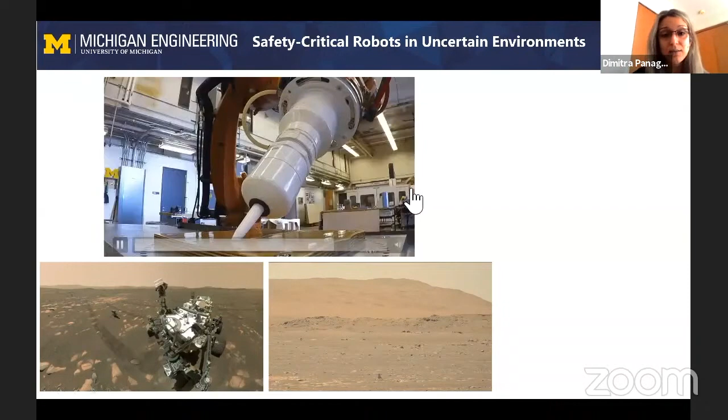And to add more excitement about uncertainty, I thought to include also the videos from Perseverance and Ingenuity that show we have robots operating on another planet.

So I think it's important and evident that maintaining safety in uncertain conditions is of paramount importance, because when this is not done and things are not carefully designed, then things can go wrong.

For example, a simple change in the payload can make a drone plummet from the sky, or not carefully designing safety inter-safety distance can make quadrotors collide with each other, or safety specifications not being met can make a rocket landing go really bad.

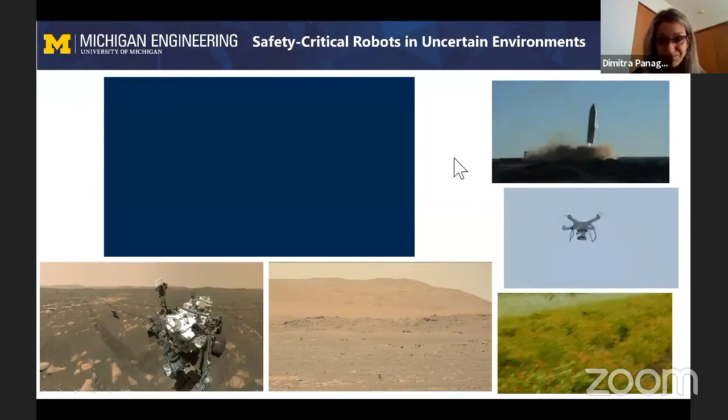So planning and control under uncertainty is a long-standing topic within robotics, artificial intelligence, and the controls communities. To keep discussing this with a simple case study example, let's consider we have a quadrotor or an aerial robot that has to navigate in an urban environment.

So there are obstacles, like physical obstacles, the buildings. There might be other quadrotors navigating also around. And it also has to navigate in the presence of processes like, for example, wind.

So the quadrotor has imperfect information about the environment through its own a priori knowledge and its own sensory information. It has to make decisions on, for example, whether it's safe to go through this path, or whether it should go around the obstacles, so that it safely keeps distance with respect to the obstacles, using information about the wind that it doesn't directly measure, so it has to estimate on the fly.

So that creates a problem of safety under uncertainty. Some of the questions related to this problem are: how we can ensure that the system trajectories will always remain safe in an unknown environment, where we might not know exactly the location of obstacles, or the wind affecting the motion of the vehicle. How we can reduce uncertainty while staying safe.

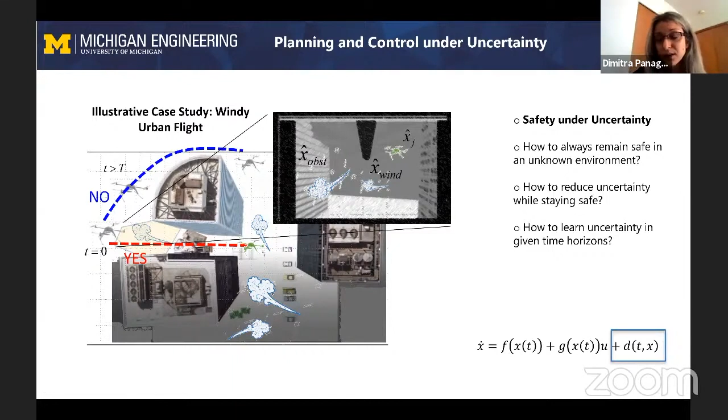We have to be able to act fast. As a control theorist, I'm more biased towards approaches where we assume we have a portion of our environment and model that we can assume we know with reasonable confidence. Anything else that is more difficult to model or measure is usually lumped into a parameter D, the disturbance. So essentially the question is, what can we say about this D, and how we can handle it in order to maintain safety?

So I'll start my talk with the simpler case of considering no disturbances, still using the quadrotor moving among obstacles as a motivating example.

I'll describe how we can encode safety as set invariance, a well-developed approach throughout the years by many people working in the area. So the quadrotor has a safe set of states in which it is allowed to visit. Essentially, safety can be cast as a set invariance problem, or how we can make the state trajectories always remain within this safe set of states.

In addition, I will consider timed specifications as one of our performance objectives. So the quadrotor does not merely need to go from initial point to a goal point, but also needs to make sure that it will visit certain waypoints in between.

Within given time horizons, in the first part of the talk I'll describe our framework on spatiotemporal control synthesis that relies on quadratic programming and merges safety encoded as control barrier functions and the timed reachability objective by means of fixed time stability notions. That is a novel construction that we have been working on.

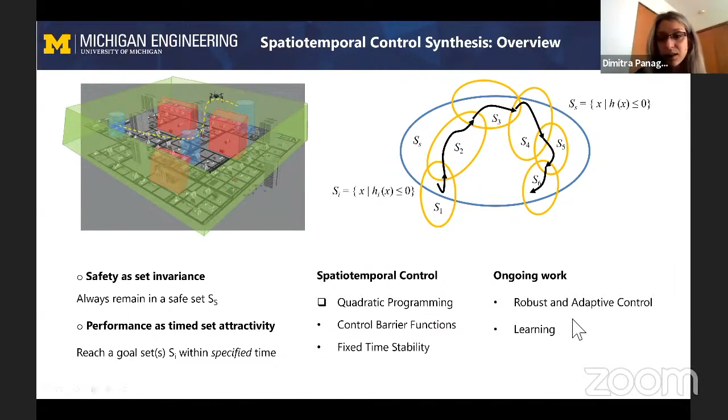And in the second part of my talk, I'm going to describe our ongoing work on how we can extend this nominal framework to account for disturbances in robust adaptive control settings, and our thoughts about how we can further integrate more sophisticated learning techniques into this framework.

Okay, so to get started with some preliminaries, safety, as I already mentioned, can be thought as a forward invariance of a safe set problem. So we consider that we have our nonlinear control affine dynamical system, no disturbances for now.

Let's assume that the safe set is given as the sublevel set of a constraint function H sub S. And the objective is essentially for trajectory starting within S sub S to never escape the set. So forward invariance has been characterized within the controls community through the so-called Nagumo's theorem that gives the necessary and sufficient conditions on set invariance.

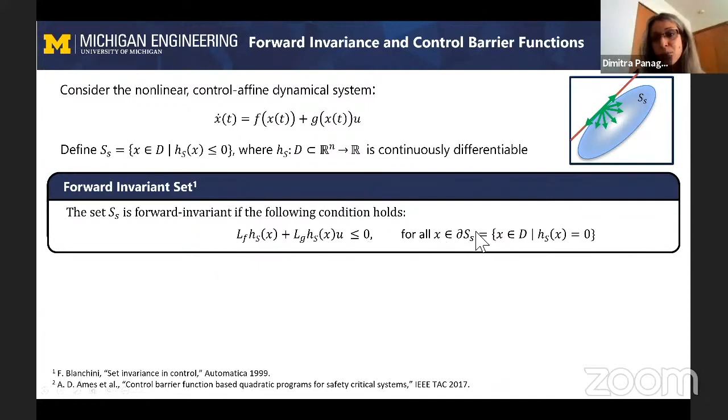So in the notation that we are using here in this slide, the set S sub S is forward invariant if the following condition here holds. This condition is nothing but the time derivative of the constraint function along the trajectories of the system, with all the assumptions that the trajectories are unique and exist in forward time and so on. Essentially, we impose that H dot is smaller or equal than 0 for all points in the set. That boils down to checking the points on the boundary of the set.

So you want to be at the place where H sub S takes negative values. So all it takes is to check whether on the boundary the closed loop vector field points to the interior of the set. Okay, so H dot smaller or equal than 0 for this notation.

So then people have developed the concept of a control barrier function. Now our function H sub S is called the control barrier function for this system dynamics and for the set S sub S if there exists an extended class K infinity function alpha such that, again, we can choose a control input, this condition holds.

Upon the choice of a control input, we can render the time derivative of h to be upper bounded by this negative quantity here that tends to 0 as the trajectories approach the boundary. Okay, so essentially, a control barrier function is a sufficient condition on ensuring set invariance.

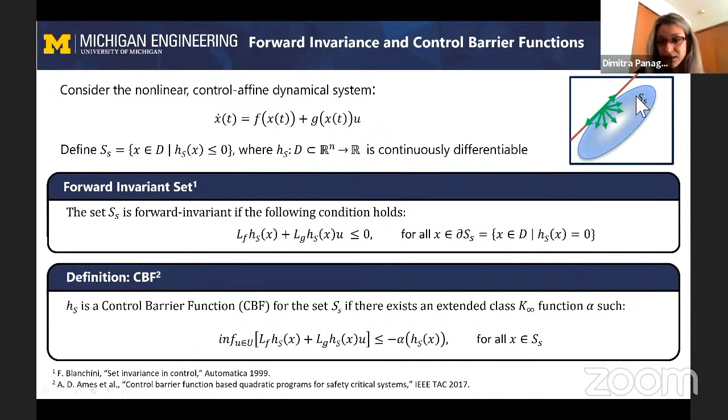The trajectories are allowed to evolve within the set. They're allowed to approach the boundary of the set, but they are penalized from penetrating the boundary. So we can use control barrier functions in order to encode safety.

In order to encode the time specifications that I mentioned earlier, let me give a brief overview of the notions of finite time and fixed time stability that we have utilized.

So finite time stability is a stronger concept than exponential and then asymptotic stability, in the sense that the time of convergence to an attractive equilibrium is no longer asymptotic with time, is no longer infinite, but rather is finite. And in fact, the notion admits very nicely Lyapunov characterizations.

So if we have a nonlinear system for which we can find a positive definite function v such that this condition here holds, then the origin is a finite time stable equilibrium with a settling time that satisfies here this upper bound. Okay, so you see that the time of convergence is now finite and in fact depends on the initial conditions.

You also notice that essentially everything boils down to tuning this parameter, this exponent beta here, which must be between 0 and 1. If beta is equal to 1, we recover the classical definition of asymptotic or exponential stability. So building upon this notion, fixed time stability is an even stronger notion that additionally dictates that the time of convergence does not depend on the initial conditions.

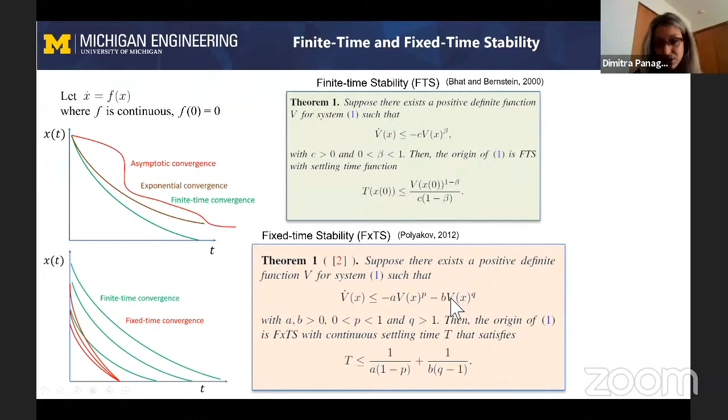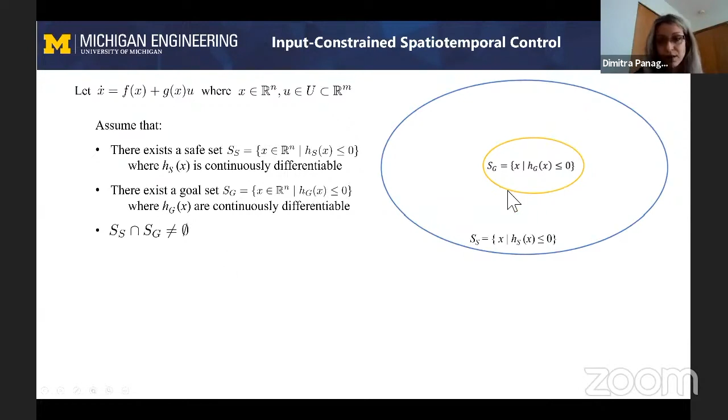With these preliminaries, let me describe again abstractly the problem at hand. We consider a nonlinear dynamical system, a safe set as a sublevel set of a safety constraint function, and a goal set as the sublevel set of a goal set function, defined such that their intersection is not empty. The problem we want to consider is how to design controllers, also constrained by bounds of this form, such that trajectories starting everywhere in the safe set never escape it and converge to the goal set within a user-specified time T bar.

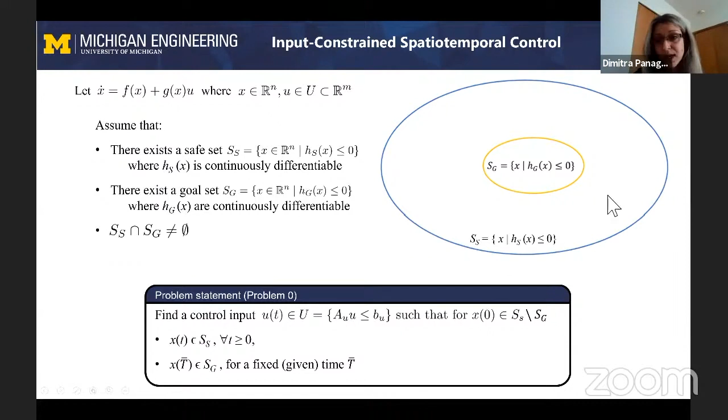It's the explicit consideration of input constraints that makes this problem interesting, because otherwise it would be straightforward to just use the fixed time stability result.

So in order to encode this time convergence specification, we got inspired by the well-known control-Lyapunov function concept, and defined the notion of a fixed time control-Lyapunov function, defined to be a positive definite function with respect to a goal set S_G, meaning it is positive outside the set and 0 on its boundary, whose time derivative upon the choice of a control input satisfies condition 2.

This right-hand side term is nothing but the term that we get from fixed time stability, with all the parameters chosen properly to abide with the fixed time stability requirements, and with the upper bound being smaller than T bar, our user-specified time.

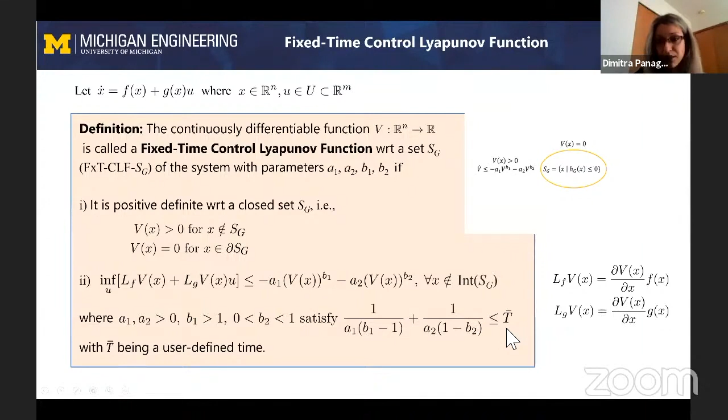In simpler words, what does that mean? It means that if we can find the fixed time control-Lyapunov function for a given system, then we know there exists a control input that can take the state trajectories to the goal set within a finite time that can be set smaller than T bar, as set by the user. That's our way of encoding the time specification.

Now trying to think again of the overall problem of designing trajectories that stay within the safe set, never escape it, and hit the goal set within our user-specified time, we can pose the following optimization problem that minimizes the control effort and the slack variables delta 1 and delta 2, subject to three specifications: safety, time convergence, and input constraints.

C1 is the first constraint of our problem, which is nothing but imposing the control barrier function condition for forward invariance of our safe set.

The second condition imposes the fixed time requirement, the fixed time specification with respect to the goal set within the user-specified time T bar. It's actually a relaxed version, in that whenever all three conditions cannot be met, we drop the time convergence specification for the sake of maintaining safety. If we need to prioritize between the two, safety is most important, so we drop the strict time requirement for convergence. C3 is obviously the control input constraints.

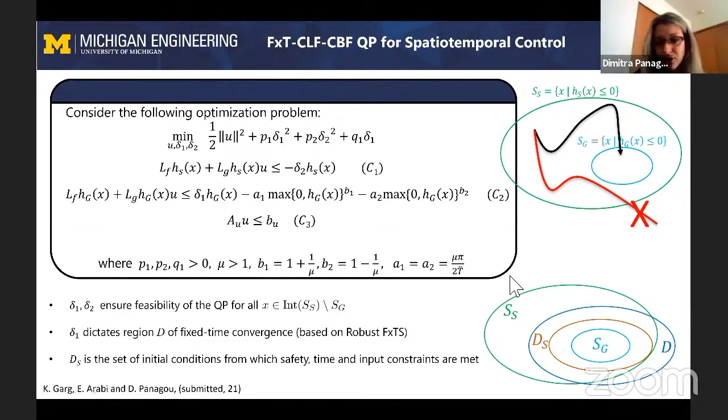The D set here represents the set of initial conditions, under these input constraints, for which the trajectories are able to hit the goal set within the user-specified time T bar. The sublevel set of this D set that is completely enclosed within the safe set is essentially the set of initial conditions from which safety, time, and input constraints can all be met. The nice thing is that all these D and DS sets have explicit characterizations in terms of the level sets of the fixed time control Lyapunov function we have chosen, which in this case is the goal constraint function. The representations are rather long and tedious, so I'll skip those.

Let's see how this quadratic program would perform for the simple case of area patrolling. Here we have two robots that need to navigate within this square while staying outside this circle, and they need to move from corner to corner no later than a given time horizon, which is given as 1 second in this simulation example.

The traced paths demonstrate that the safety requirements are met, also evidenced here by the inter-agent distance shown in this figure. We can also see that the control input bounds are met for the closed loop trajectories of the system, and that the time specification is met because the control input goes to zero, with the vehicle stopping whenever it reaches the goal set, well before the imposed time horizon.

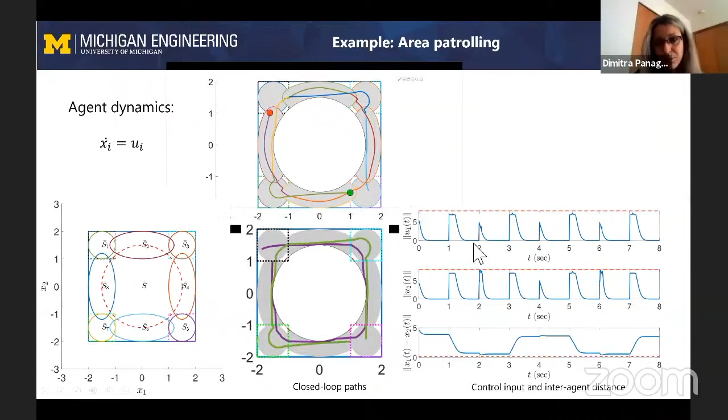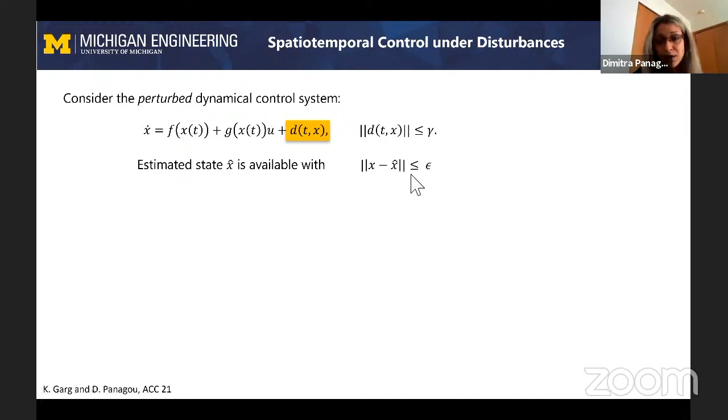So that was the nominal construction, relatively easier than the case of considering disturbances. Now, if we want to consider the perturbed dynamical control system, one approach is to use some assumption about the disturbance. A standard way is to consider an upper bounded disturbance with a known bound, and maybe also consider that the available information from sensors and communication links is bounded with respect to the true value. So we think now how to extend the QP design in the case where we may also have dynamic obstacles.

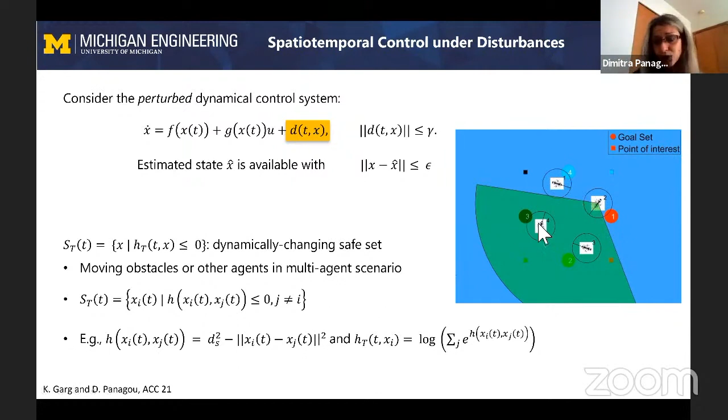Think of many robots moving in the same workspace. They need to avoid each other, and they might have constraints like always maintaining a point of interest within their field of view, which is more like a static safe set constraint. The dynamic safe set would be always maintaining a safe distance with respect to other moving agents in the environment. We want to do that safely while reaching our goal sets, again with specified times.

One way of incorporating the information about your disturbance into the CBFs and CLFs can be written in this form, where we add the effect of the disturbance and the assumptions we make about the Lipschitz constants of the constraint functions into the condition for maintaining safety. This, in effect, shrinks the effective safe set we want to consider, because we're uncertain about the environment, so we have to be more conservative about what we think is our safe set.

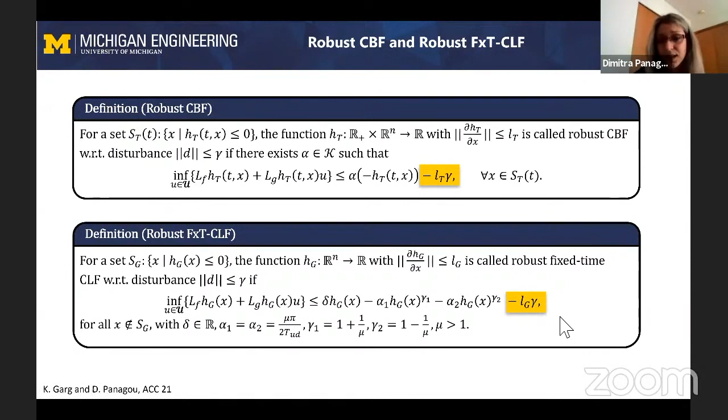Similarly, we can extend the definition of the fixed time control Lyapunov function to its robust version, where everything stays the same except we add the effect of the disturbance and its assumptions. In effect, this tells us that we may not reach exactly the goal set, but a neighborhood around it, and that neighborhood depends on the magnitude of the disturbance.

Once we have these definitions, extending the quadratic program to take into account these robustness considerations is quite straightforward. We use the same type of constraints for input, for the time requirements on our goal set, and for the forward invariance of our two sets, the static safe set and the time-varying safe set, where all the control barrier functions and fixed time control Lyapunov functions are tweaked to account for the unknown terms.

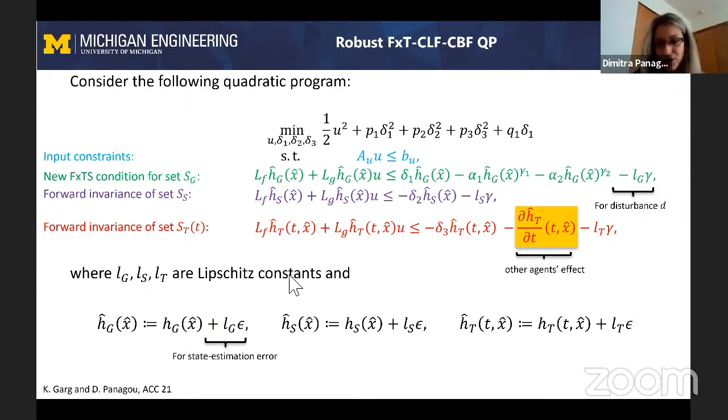This accounts for the effect of the state estimation error we consider we have, and the effect of the disturbance, as well as the effect of other agents for the time varying safe set. Solving this problem gives you a solution, and to visualize the response, we consider a case study of the 2D motion of under-actuated underwater vehicles, which experience disturbances in the form of upper bounded currents and wave effects applied to them.

The control objectives for these vehicles would be to reach goal regions within user-specified times, while keeping a point of interest, like a landmark, always in their field of view. You can think of it as the static safe set specification, while also maintaining a safe distance with respect to the other agents, which accounts for a time-varying safe set.

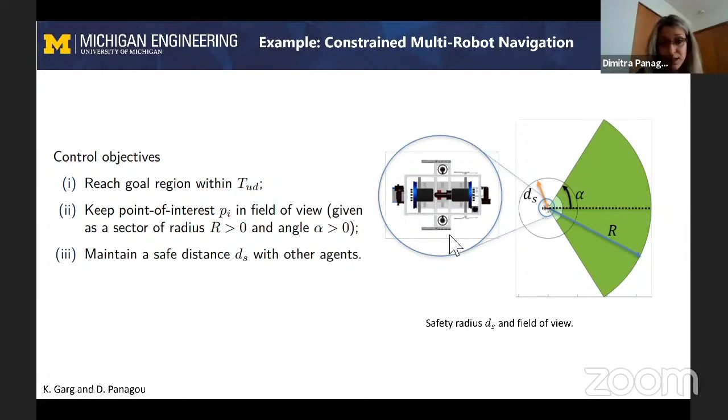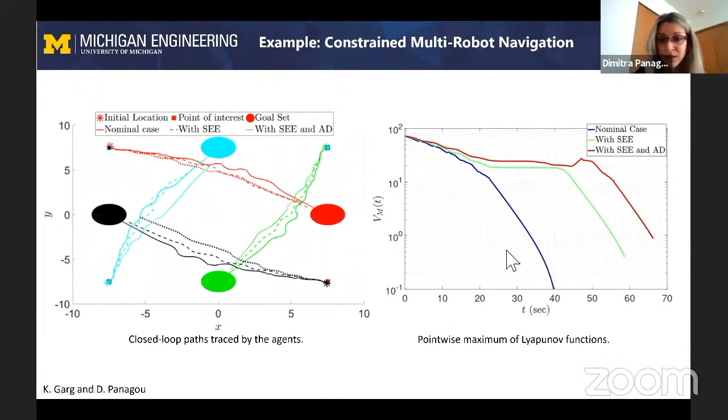How far, or the size of this neighborhood, depends on the magnitude of the assumed disturbances. So the smaller the assumed disturbances, the closer you can get to your nominal goal set. This is one way of treating things.

You can consider your disturbance as something you can upper bound, and then plan accordingly. That gives you robustness and ways of maintaining safety, but at the expense of being probably overly conservative. So the question is, can we do something better than that?

And delta is a known and bounded matrix. Under the classical assumptions used for adaptive control—that the set the parameters might belong to is known, compact, and convex, and that this delta regression matrix can be persistently excited—

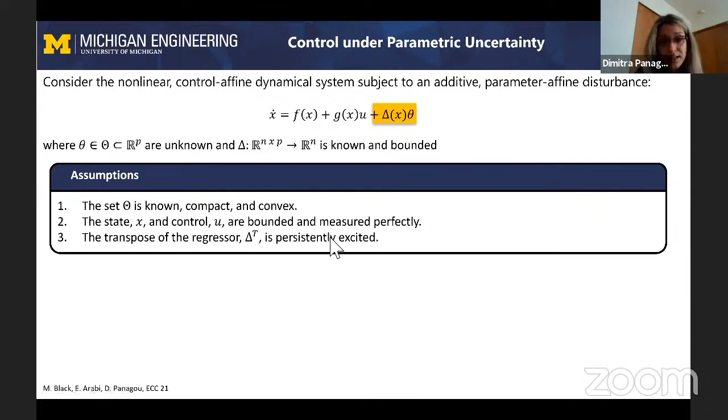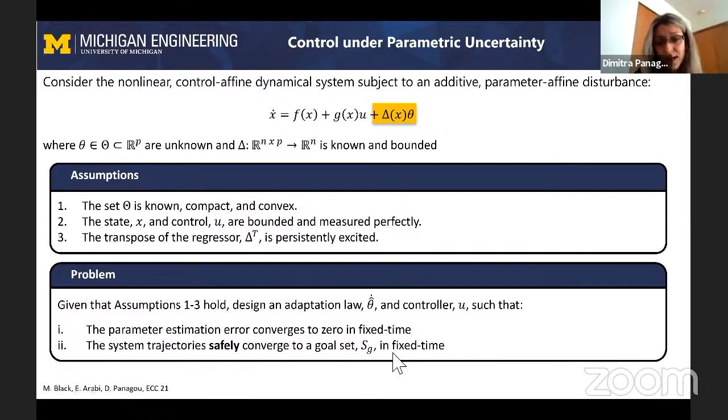the problem we're considering is how to design the adaptive control law such that the parameter estimation error converges to zero in fixed time, in an attempt to reconstruct the true dynamics in fixed time. In addition, how to design our control input such that, similarly to before, the system trajectories converge to the goal set in fixed time and always remain within a safe set.

So the main idea here is how you can tune your adaptive control law so that you make your estimation error for the parameters converge to zero in fixed time. I don't want to spend time explaining this filtering scheme involved with the adaptive control law—this is just an adaptive control approach we borrowed from the literature.

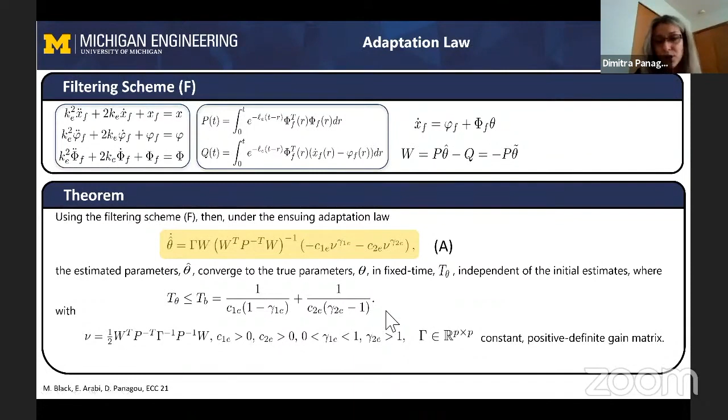But the point is that we tweaked the adaptive control law with this term, which I'm pretty sure you're already familiar with, that imposes fixed-time convergence of the parameter estimation error. We can show that the parameters converge to the true parameters in fixed time, upper bounded by a known bound that depends on gains properly selected by the user. So what's the good thing about that?

I'll probably be able to explain better with a case study. We considered a case where you have two obstacles located very closely, creating only a very narrow passage for a robot to move through. Let's consider a robot modeled as a single integrator, subject to additive disturbances that could model, for example, some undulation in the environment.

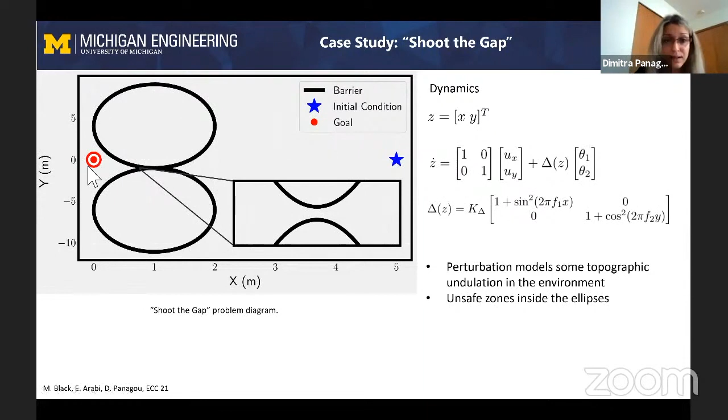We choose our modeling such that this delta matrix here is persistently excited. The objective is to start from an initial location and make it through the gap, or shoot the gap, and converge to a goal location on the other side of the obstacles. We implemented our proposed fixed-time adaptive control law in combination with our robust QP formulation shown earlier.

We compared the performance of the method with respect to other similar work in the literature, which has been very vivid and ongoing on adaptive safety and other methods that use adaptive identification through set membership and so on.

What you can see here is that our method, because it learns essentially the dynamic environment in a fixed time, it learns it quickly enough. It makes the robot understand that it is safe to go through the narrow passage, because this uncertainty bound is shrinking over time, whereas other methods that don't have this adaptivity fail to go through the narrow passage because they think their uncertainty bounds tell them it's not safe.

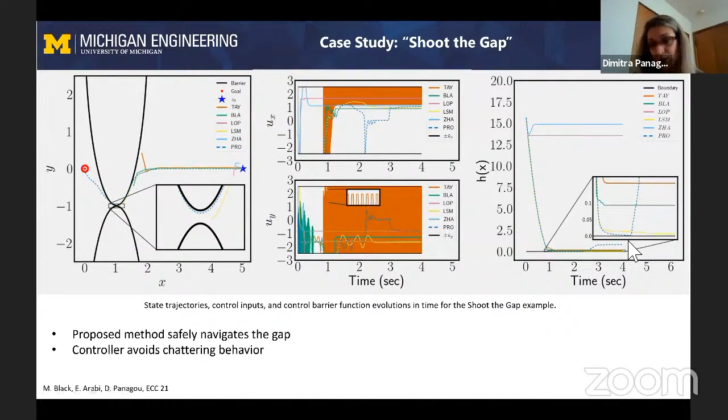This plot shows that our approach has good performance characteristics in terms of avoiding the excessive chattering that other methods have. This figure to the right shows that the control barrier function over time approaches the safety boundary much closer than other methods are allowed to approach, because we are learning the true dynamics fast enough.

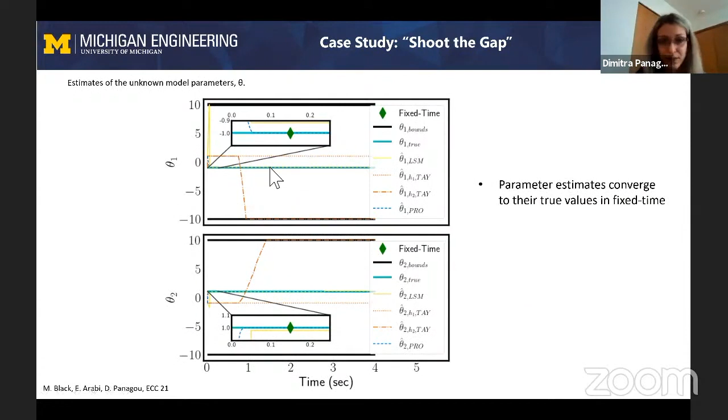Let's keep that brief for the interest of time. That just shows that the fixed time requirement is also met.

So to start wrapping up, we have treated safety in robust control frameworks that utilize control barrier functions and fixed time control Lyapunov functions in order to encode safety and time convergence specifications. We have started investigating how adaptive control techniques can be used to reduce the conservatism that inherently comes with robust control formulations, and we are also trying to see what's the correct mixing between model-based and model-free approaches.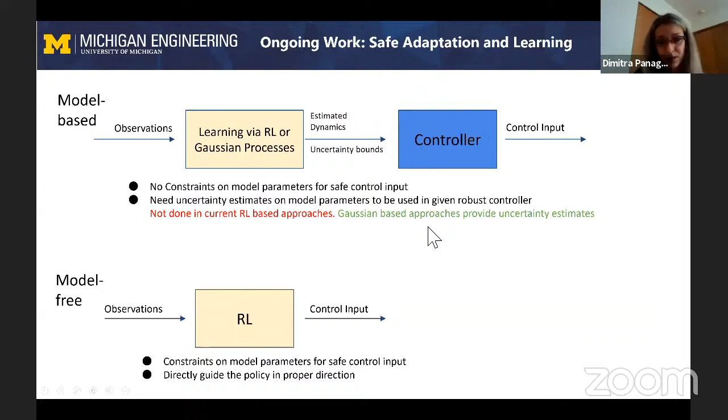So instead of adaptive control laws, what are the right representations, what are the right means of learning the uncertainty by means of Gaussian processes or reinforcement learning, so that we can estimate the dynamics with confident uncertainty bounds that can be fed to our controllers. And in fact, how we can even use the control input to collect the appropriate observations for this loop to work efficiently and with safety on time, every time.

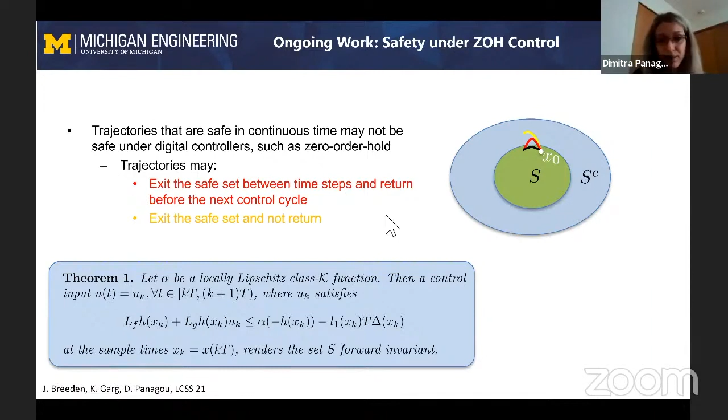So no, that was essentially my last slide. And if you have any quick questions, I'm happy to answer. Thank you very much for attending my talk.

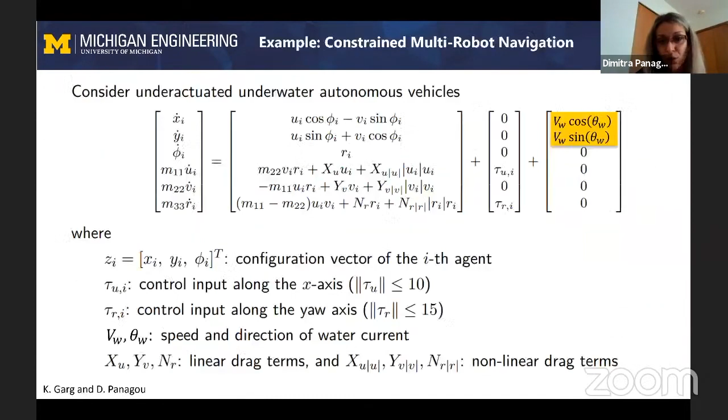That's a very interesting question. Because we have the interconnection with the control input constraints, the conditions are given in explicit closed forms, which I don't know if I even have a backup slide here to show.

So all these are long expressions, but they are expressions that involve the sub-level sets of the candidate control Lyapunov, fixed time control Lyapunov function that you have chosen, which in our case is the goal reaching constraint function as the candidate fixed time CLF.

I'm happy to send you references.